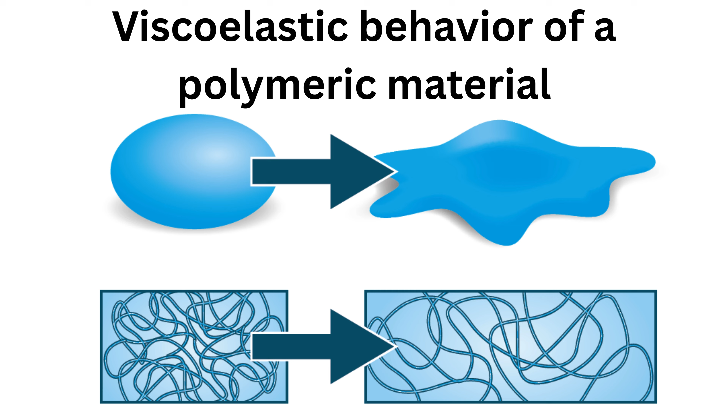The simplest models for the deformation behavior of an ideal material are those of Hookean linear elasticity in the solid state and Newtonian linear viscosity in the liquid state. The end point of elastic deformation is either fracture or plastic flow, with the latter taking place at a constant yield stress in the ideal case.

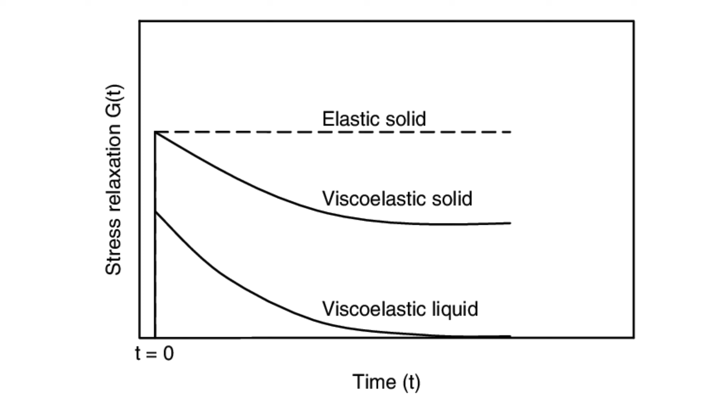Whilst the behavior of many real materials does approximate to these idealized models, that of polymers deviates markedly from them. In particular, their solid-state deformation is time-dependent and nonlinear, and so resembles some combination of elastic and viscous responses, whilst their melt rheology is also significantly nonlinear.

To start with, let's consider polymer behavior in the context of the idealized models of elastic deformation and of viscous flow. Elastic and viscoelastic behavior.

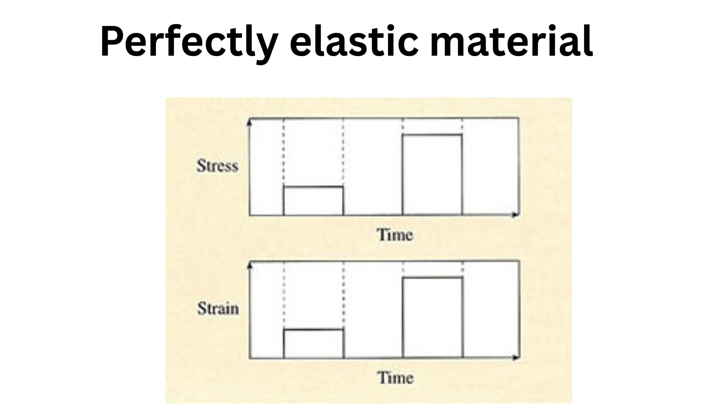When an elastic, not elastomeric or long-range elastic, material is stressed, there is an immediate and corresponding strain response. When the stress is removed, the strain also returns to zero. So in a perfectly elastic material, all the deformation is returned to the forcing agency. If this energy had not been stored elastically, it would have been dissipated as either heat or sound. Tire squeal and the heat buildup in the sidewalls of car tires are good examples of such dissipation.

If the material is linear and elastic, then the applied stress sigma is directly proportional to the strain epsilon. For simple tension, sigma equals E times epsilon, where E is a constant known as Young's modulus and is considered to be a property of the material. For polymers, due to time dependence and nonlinearity, E is not a constant, and the term tensile modulus is used to reflect this.

When the stresses are removed from a polymeric material before fracture, the strain recovery path is not necessarily identical to that of the loading part of the deformation cycle. So energy must have been dissipated during the deformation of such materials, another indication of deviation from perfect elasticity. Both the deformation and the subsequent recovery are time-dependent, suggesting that some part of their behavior is viscous.

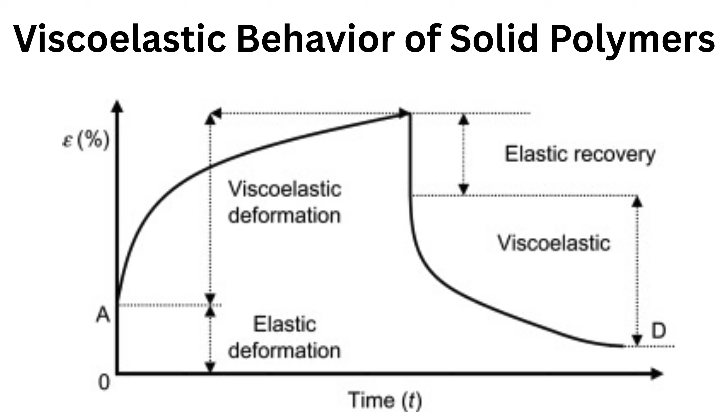In fact, solid polymers show a combination of elastic and viscous behavior known as viscoelasticity. The degree of viscoelasticity is strongly dependent upon the temperature of test and the rate at which the polymer is deformed, as well as such structural variables as degree of crystallinity, cross-linking, and molecular mass.

Viscous behavior. Viscous flow is not recoverable. When the stress is removed from a viscous fluid, the strain remains. Hence, the work energy is not returned to the forcing agency and has to be otherwise dissipated.

For a linear viscous material, the rate of change of shear strain with time is directly proportional to the imposed shear stress tau. The viscosity is also directly dependent on molecular mass, and so inversely related to melt flow index. These factors are thus of direct importance to a processor or molder.

Viscous properties dominate during the earlier stages of processing, but elastic effects are also important. Molten thermoplastics are obviously highly viscous, as are partially polymerized and uncured thermosets and masticated and unvulcanized rubbers. However,

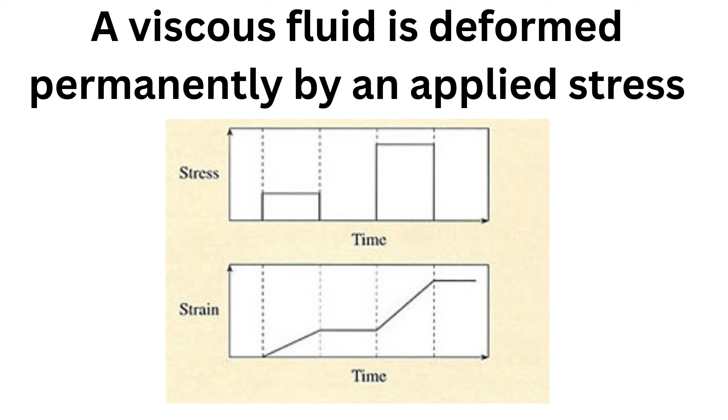Observable features such as the swelling of extrudates as they leave dies are manifestations of melt elasticity. In essence, elasticity in molten polymers arises from the entropy factor, or the tendency of the macromolecules to coil into their configurations of maximum disorder. This is in opposition to the stretching which occurs as the material flows under the influence of the stress field.

Viscoelasticity and master curves. An immediate consequence of the viscoelasticity of polymers is that their deformations under stress are time-dependent. If the imposed mechanical stress is held constant, then the resultant strain will increase with time, i.e., the polymer creeps. If a constant deformation is imposed, then the induced stress will relax with time.

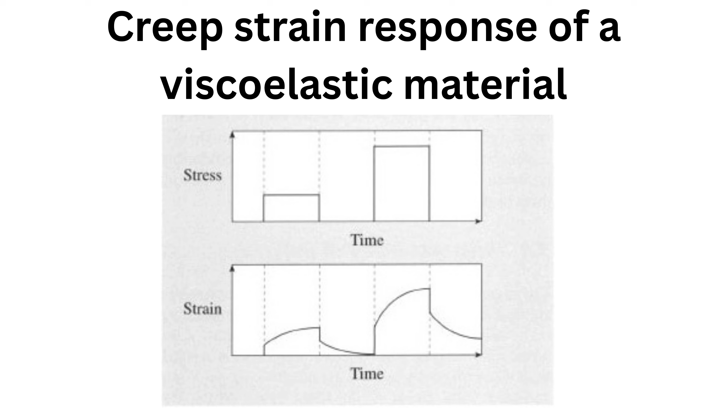Creep. There are many examples of products which creep in service. For example, the plastic tub of an automatic washing machine will successively creep and recover as it is loaded and unloaded several times during the washing cycle. Viscoelastic stress analysis during the design of the tub ensures that the maximum strain due to this loading pattern is well within the strain limits for the material and the application.

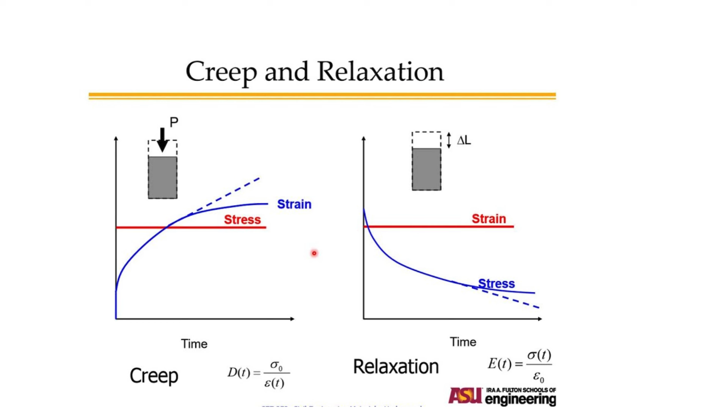The creep and stress relaxation properties of a polymer can be described by the time-dependent moduli Ec and Er. The creep modulus is the ratio of an imposed constant stress to the time-dependent strain, while the stress relaxation modulus is the ratio of the time-dependent stress to an imposed constant strain.

Practical examples of the need to design for stress relaxation are in seals, where the sealing force must remain adequate under conditions of constant deformation, or when a metal peg needs to be held in a plastic block by push-fitting into an undersized hole.

The oversized peg results in a constant hoop strain in the plastic. The corresponding hoop stress will decay with time, but must always be sufficient to hold the peg in place. Both creep and stress relaxation are factors that have to be considered in design, although they are not necessarily always deleterious.

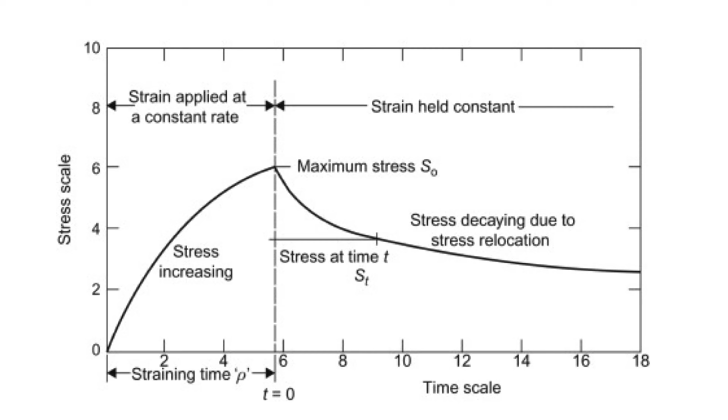Time-dependent relaxation modulus ER is characteristic of the polymer concerned at a particular strain and temperature. It is the tensile stress relaxation modulus if the corresponding strains and stresses are tensile. Alternatively, if the strains and stresses relate to shear or hydrostatic changes, then the corresponding material parameters are the shear and bulk relaxation moduli, respectively.

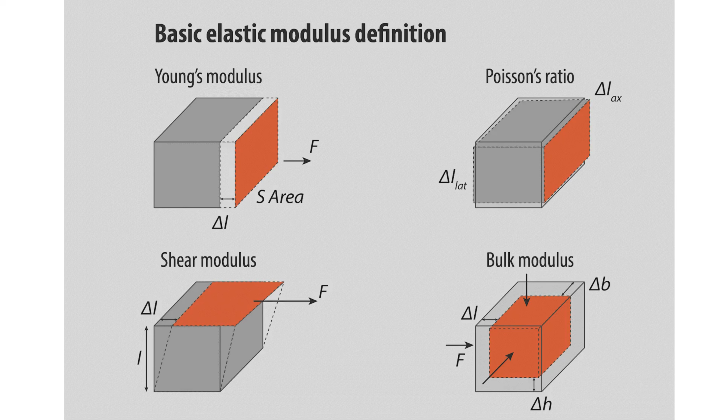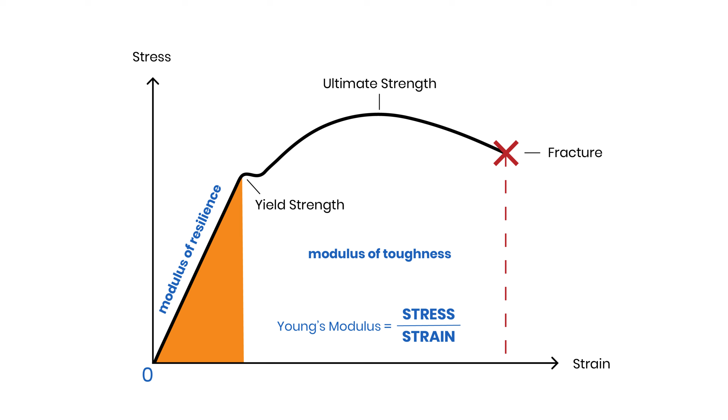For polymers, the tensile modulus should not be referred to as Young's modulus. Young's modulus is the limiting case of the tensile modulus, when the induced strains can be considered infinitesimal and independent of time. Time-temperature superposition: for amorphous polymers above their Tg, there is a convenient approximation which makes experiments easier.

It is known as time-temperature superposition, and it relates time to temperature for viscoelastic materials. A sequence of measurements of ER is performed at different temperatures at a fixed initial strain. The timescale might be limited between several seconds and, say, 100 hours.

As the material passes through the transition region, the modulus drops rapidly. The material is becoming rubbery in its response to the applied stress. The onset of true elastomeric behavior is marked by the so-called rubbery plateau. This is followed by another steep fall in modulus, where viscous flow occurs as the temperature is raised further.

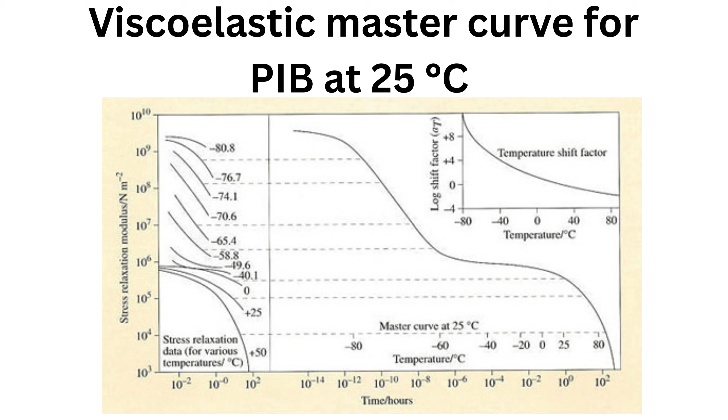Effects of structure on viscoelasticity. If a single measurement of ER is taken at an arbitrary but fixed interval of time, say 10 seconds, then it will vary with temperature in a way rather similar to the viscoelastic master curve.

The effect of lightly cross-linking the material is to eliminate flow of any kind, extending the region of elastomeric behavior to higher temperatures. Heavier cross-linking will move the rubbery plateau upwards, and the same net effect is achieved by crystallization.

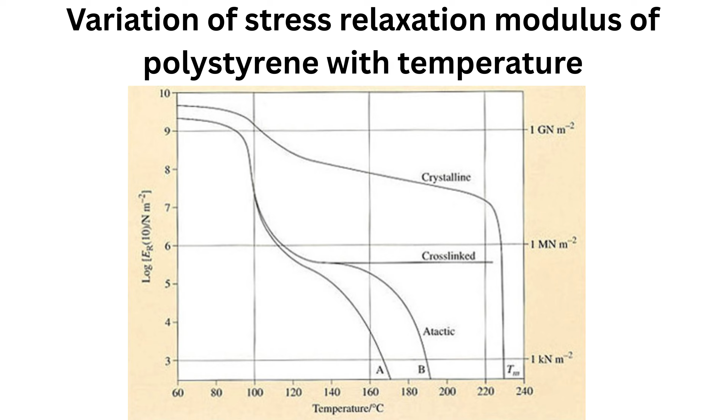Although atactic PS is inherently non-crystallizable, the isotactic form can crystallize, and its melting point, Tm, is about 230 degrees Celsius.

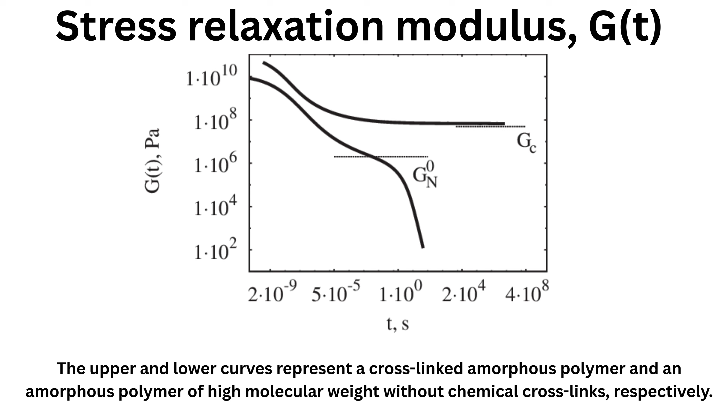Molecular mass also affects the stress relaxation spectrum, particularly at intermediate and higher temperatures greater than 100 degrees Celsius. For high molecular masses, only the rubbery plateau and viscous flow regions differ markedly. The glassy and transition regions are unaffected. Increasing molecular mass clearly improves some mechanical properties, but nowhere near as effectively as crystallization.

Dynamic mechanical properties. Viscoelasticity is not experienced just under quasi-static conditions, that is, when the imposed stresses and strains are constant or change only slowly.

Polymers, and particularly rubbers, are often deliberately selected for products which are to be subjected to dynamic mechanical loading. Tires are an obvious example where the unique high-strain elasticity and energy-absorbing qualities of rubbers make them the natural choice of material. Stress analysis involves the use of the frequency-dependent dynamic moduli of the polymers.

Stress analysis concerned with the dynamic mechanical properties normally assumes that polymers are linearly viscoelastic. The strain response lags behind the stress by the phase angle, owing to the viscous component of the material. Some, but not all, of the energy stored during the deformation of the material is dissipated.

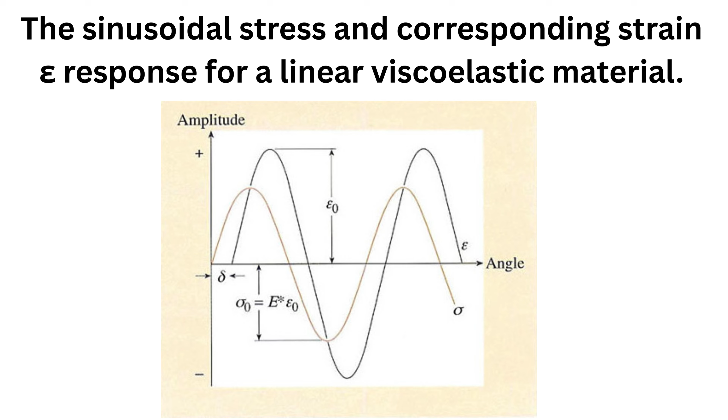Since the material is assumed to be linear, the stress is proportional to the strain at all times, that is, sigma equals E epsilon, but E is a function of the frequency omega. Because the stress and strain are not in phase, E must be treated as a complex function.

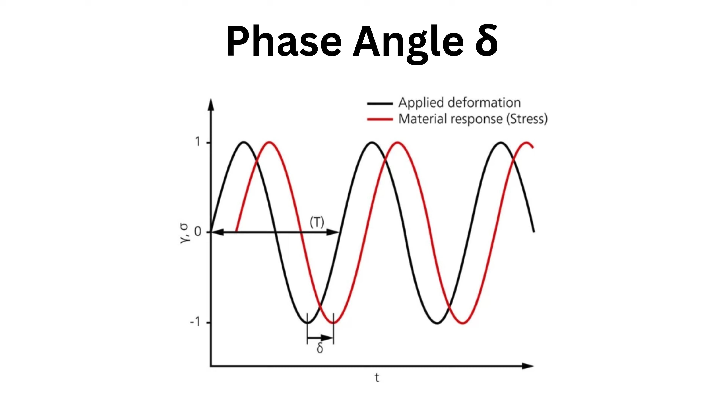From the definitions of the dynamic moduli and by manipulation of the linear relationship between the sinusoidal stress and the corresponding strain response, the phase angle delta can be expressed as follows: tan delta equals E double prime divided by E prime. Tan delta is commonly called the loss tangent or damping factor.

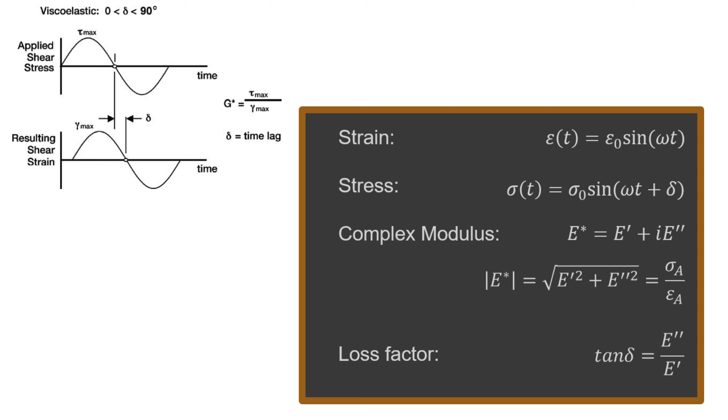E prime and tan delta are the most commonly measured dynamic properties of rubbers, representing the elastic stiffness and damping or hysteresis properties respectively.

The damping factor is then small, but it increases to a maximum value in the leathery transition region between the glassy modulus and the usual low modulus, which is characteristic of rubbers that are deformed slowly, at omega less than 1 cycle per second, or hertz.

It is important to note that decreasing the frequency of oscillation imposed on the material is equivalent to increasing the temperature. Glass-like behavior is experienced at high frequencies. This is another manifestation of viscoelasticity, in which the effect of the 3 basic variables, time t, temperature T, and frequency omega, on a polymer are all closely interrelated.

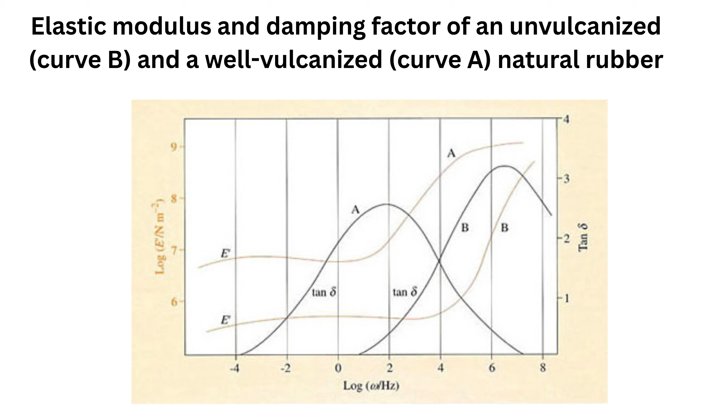Since decreasing the timescale of an experiment is equivalent to decreasing the temperature, so decreasing the frequency is equivalent to increasing the timescale and hence increasing temperature.